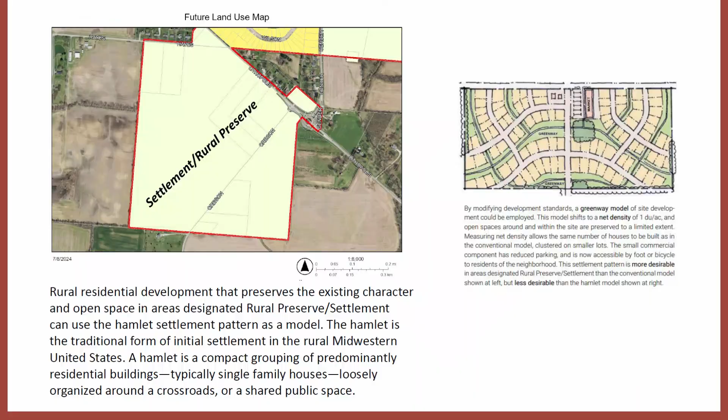Thank you. So, Mr. Moore, going to the Greenway model, we've improved density to be allowable within the code, got approximately 12 feet from building to building, which has increased the lot width to, I think you said, 52 feet. And the traffic study has been done and is back for review.

So on the traffic study, who is responsible for those proposed improvements? I believe you said Hayes and Lithopolis Road. Yes, the improvements contemplated from the developer's traffic study include a left turn lane at Lithopolis and Hayes Roads for westbound traffic on Lithopolis Road.

It also includes a right turn lane at the access point on Lithopolis Road between the commercial and townhome subareas, and a left turn lane there. There were some deficiencies in how lane configurations were put into the model for the traffic study, so we've asked them to look at those at the roundabout in those areas, but there are improvements that will be required.

That would be the developer's responsibility to complete those improvements. There will also likely be improvements along Oregon Road, because that roadway is not in a condition that would support this amount of traffic and development on it. That roadway is 19 feet wide with no shoulders, and would need to be brought up to our typical roadway standard, which for a minimum roadway is 26 feet wide.

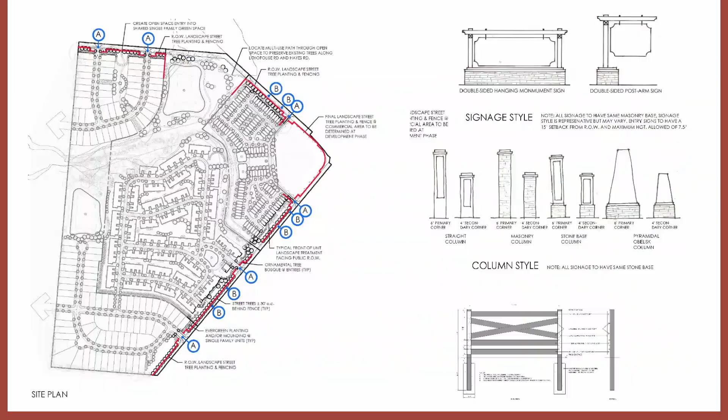Andrew went over the public street, private street exhibit, but it's worth noting that with this trail that comes in, we are creating over 10,000 lineal feet of this 8-foot multi-use path. You see it all along the frontage, meandering down along Lyle Creek, coming up out of this cul-de-sac, crossing over Lyle Creek twice with pedestrian bridges to really unify the neighborhood - so if you live here, you can get out, walk your dog all over the neighborhood, cross the creek, come out along the road frontage, and have a first-rate quality neighborhood and place for folks to live.

Speaking of dogs, there's a commitment to do a dog park here within this sub-area. As Andrew previously mentioned, there are commitments to some activation up to the open space created east of the single-family houses, with the gazebo and the pond overlook. We have significant tree preservation with the proposal, as Andrew mentioned.

That one kind of shows the existing conditions, right? Or is this the tree preservation? Existing conditions - it's the removal, but all the dots are existing.

So you can see we are coming along Lyle Creek, preserving a significant portion of that, preserving the trees along the west perimeter, with an effort made to preserve the trees up along Hayes on the north, and certainly along the perimeter on the south, as a good transition to the single-family residential that exists down there.

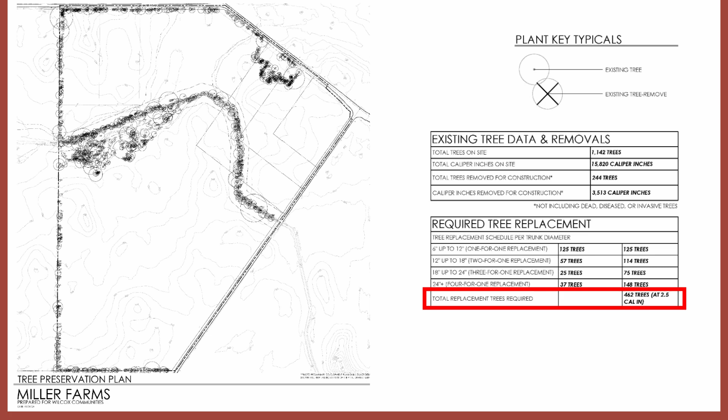The landscape plan shows significant new landscape plantings, all the circles you see all over this thing. It's going to be really very well landscaped. The landscape architects are here, Todd Faris and Anna McGeady sitting here in the red shirt. They've done really a great job of helping us envision this site and landscape the heck out of it, which is a quality of life issue, and people love to live in a neighborhood like this with nature, with mature tree preservation, with all of the trail connectivity.

Another important thing is that this development unlocks for Canal some planned growth in your 2023 comprehensive plan. The property adjacent to the west, this is the city limit—our western boundary is the city limit. The property to the west is not presently in Canal, but because it touches Canal, it can be annexed into Canal, and that's likely to happen. This development fosters that additional growth, which your plan says you want to have happen. It fosters that growth by providing the utilities, the water lines, the sanitary sewer lines, the storm sewer, and the road connections to make that property developable at all. This property is going to have to develop in order for the property to the west to be ready for development. And Lucas, if I ever say anything you disagree with, jump in and correct me.

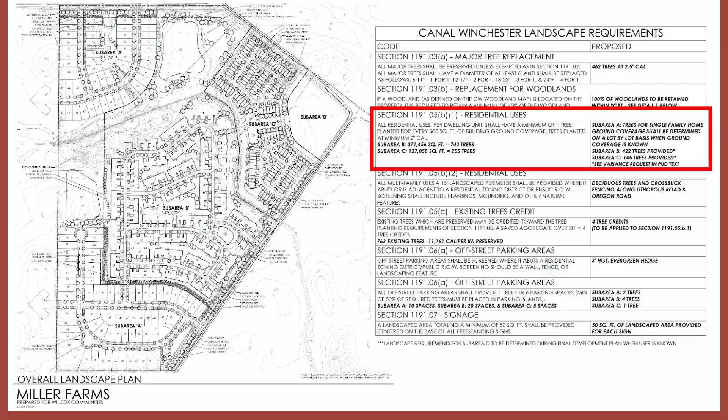We talked a little bit about the traffic impact study, and that study, as you heard, is underway. Mr. Donahue, you asked whose responsibility that is—that's not a burden that's going to be stuck on Canal. It's something the developer undertakes. That traffic impact study has worked with private traffic engineers, with Canal's engineers, and Canal's contract engineers. The study determines what road improvements are going to be warranted out here on the three adjacent streets, and those road improvements will have to be made by the developer of this property. Not something Canal will be stuck with.

I feel like I'm talking too much, so I'm going to go really fast through this, and then I'm going to shut my mouth, and between me and the team here, we'll do our best to answer questions. Andrew did a great job on the overall presentation.

Sub-area A here you see is traditional single-family residential, on 52-foot lots. That increased a little bit with some planning commission feedback, which also changed the side yard commitment to 6. I reached out to a friend of mine at MI Homes this afternoon—he's been following along, everybody's following along—and asked him what he thought the price points were going to be for homes at this level of commitment, and he said they're going to be north of $550,000, easy. So that speaks for itself. The housing on these 52-foot lots will be $550,000 at a minimum, and that's what makes it tough. A starter house these days by a production builder is around $300,000 to $350,000. So this is an elevated product here, driven because Canal set the bar high, adopted your residential appearance standards, and requires a top-notch development to happen here, which is exactly what we are proposing.

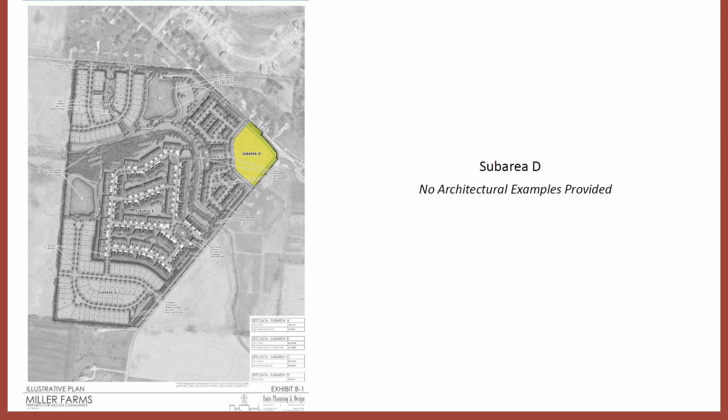We don't know the architecture yet. We intended to write the text such that there would be some uniform characteristics between that sub-area and the other sub-areas. But that architecture would have to really get honed in, dialed in, and decided at the development plan portion in the later phases of the process.

Oh, what have I left out, Chris?

Well, we appreciate the opportunity to be here with the development. It truly is here tonight with a lot of hard work—a lot of hard work through evenings and weekends. Most of that has fallen to me, to Chris, and to Anna to get this done and shaped up and in a spot that it's appropriate for Canal. We've been at it several months, really working at it before we even filed an application.

When I heard tonight that I had to get 4 affirmative votes to move on, it broke my heart a little bit, because I did plan to ask for a vote tonight. But if the staff and the commission feel that we still have significant work to do, then certainly we're committed to being here, so we'll go back and do that significant work.

But I do stand by what I said earlier. If you look at the preliminary development plan requirements in your code, and what we've done with the creation of this book and the level of commitment that we are making to Canal, we are making really a first-rate proposal to you. And this is going to be, I think, a great neighborhood for Canal, and it's going to establish a precedent for how things happen on the property to the west and other properties.

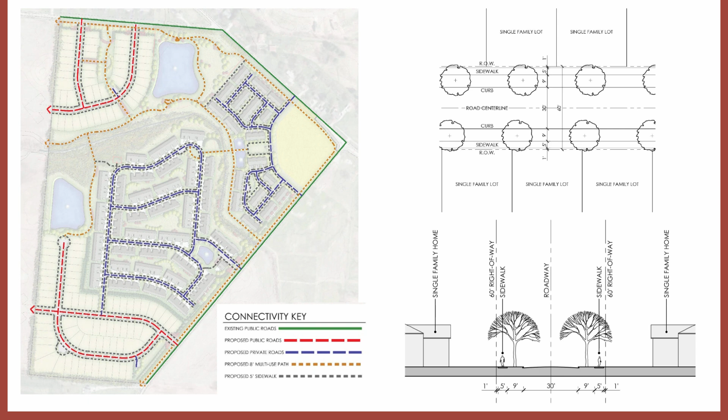Could I add one more thing? Absolutely. Would you flip over to the architectural page?

All right, so... I found a laser pointer if you want it. Okay. It's that green button right there.

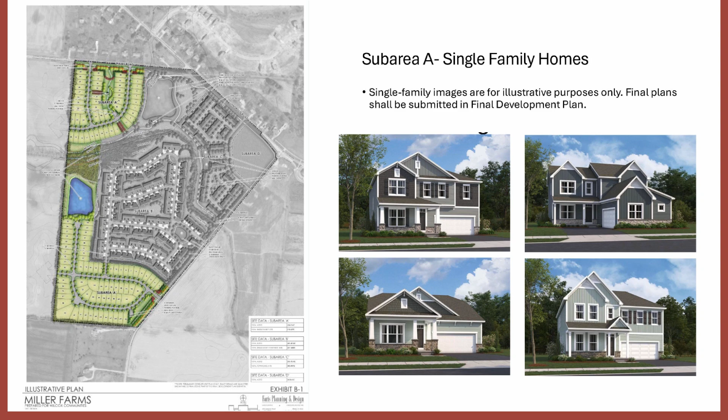All right, now we're in business. So flip over to the Wilcox architecture.

If I'm understanding correctly, and I often don't understand everything correctly, the issue is that we're not choosing two brick colors tonight, or two families of colors, for the stone.

The reason we are reluctant to do that now—look, if this is what Wilcox wants to do, they have some other color schemes and some other architectural styles. I think the reason we went with this one is that your staff said it was their preference among the various types of product that Wilcox does.

So it's hard for us to say tonight that that's going to be the color in all of the sub-areas, not just the Wilcox sub-area, when we don't know if we leave here and go to your elected officials and they say they like your other style better.

This development is independent of the rest of the city, so to speak, in terms of its location. So I think the consistency laid out in most of this text—I understand the aesthetics and things like that could change through the final development process.

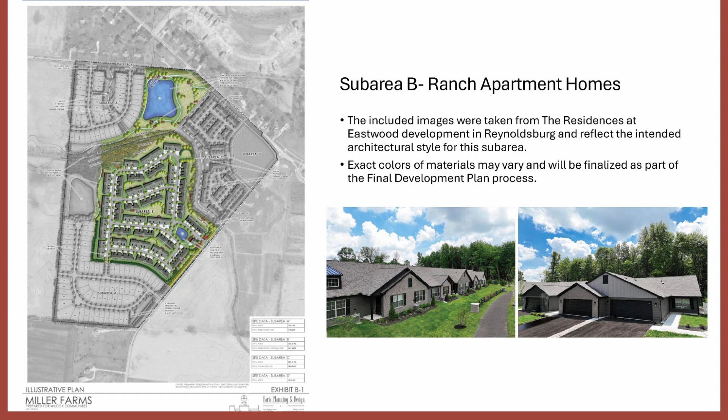So there was not a public hearing held during the last hearings of these applications. We decided to table those. So the applicant is asking for a vote this evening. We have collectively talked about both applications this evening, so I'm going to open up the public hearing for the zoning map amendment change that's on the floor before us. But feel free to speak about the preliminary development plan or the zoning map, either application.

So if any member of the public wishes to speak, you can come to the podium. Time limit's 3 minutes. I won't start the timer until you start talking, and I'll kindly interrupt you with 30 seconds left. But if there's anything anybody wishes to speak, now is your time. And please, when you come to the podium, just sign in. Once that's done, state your name and your address, and please speak—what's on your mind?

My name's Adam Karshner. I'm a resident at 115 Pfeiffer Drive. We don't need any more multifamily units in Canal Winchester. I've never heard anyone in this city get excited about more apartments other than developers and tax collectors.

I'll be pushing for new legislation with council to limit the ratio of multifamily units per acre to what it is currently. The city's ability to provide infrastructure, services, and maintain the community's quality of life will be impacted by more high-density housing. Just speaking in terms of traffic, we do not need what this development offers.

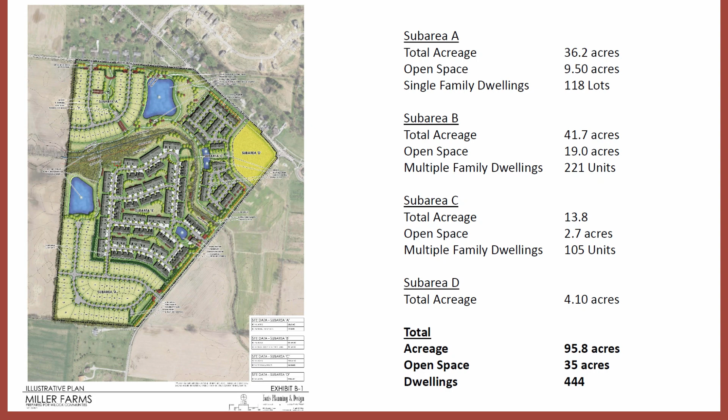I need a motion to adjourn. Move to adjourn. Second. Roll call? Mr. Wildenthaler? Yes. Mr. Donahue? Yes. Ms. Gooden, yes. Mr. Paulsgrove? Yes. Time out 8:32 PM.